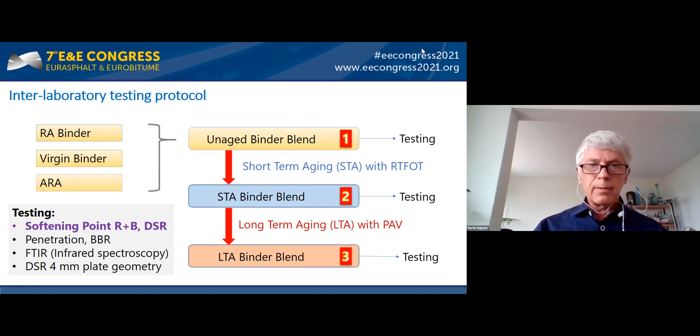So what we actually want to do is to simulate the recycling or the production of hot mix asphalt with 60, 80, and 100% of reclaimed asphalt. So for example, for a 60% rate, you would need 60% of reclaimed asphalt plus 40% of virgin material, which is binder and aggregate.

If we break it down to the binder level, this is 60% of reclaimed asphalt binder plus 40% of virgin binder, plus a small amount of ARA just to soften the reclaimed asphalt binder to the same target value as a virgin binder in this case. So by that, the ratio of the ARA and the reclaimed asphalt binder is constant, so it doesn't matter how much virgin binder we are adding.

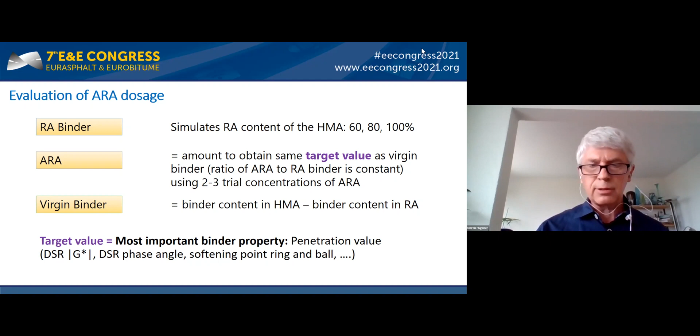The target value is quite important, which we choose, because not every method gives the same ARA dosage, but we did choose the penetration value because it's commonly used. Other methods are also possible, like softening point ring and ball, or G star, that's also an option.

So the first step was then a pre-study to determine the optimum dosage. So if we start with the reclaimed asphalt binder, we did add 5 and 10% of ARA, and you can see that with 10% we are a little bit above the virgin binder properties, a little bit softer. So we decided to use 9% for this interlaboratory study.

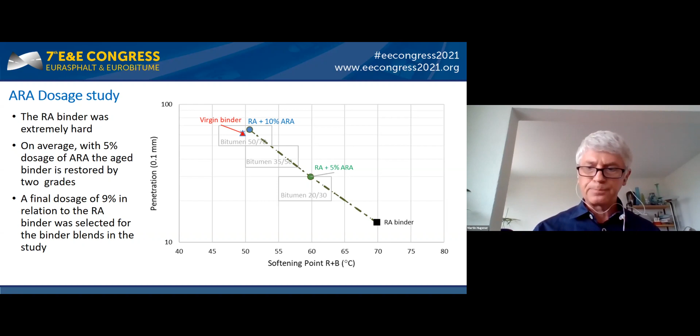So then, to assess the results of these binder blends, we have to compare it to something because we don't have any requirements to meet. So we used the virgin binder we also had as an additional binder, which we did age in the same way, short-term aging and long-term aging.

And you see we come from the penetration of about 60 down to 25 penetration value. It's still quite far away from the reclaimed asphalt binder penetration, which is about 15, but this was actually not the goal to reach that. What we also can see here is that the reclaimed asphalt binder, although it's even quite hard, it's still aging, not in the same amount as the virgin binder, but especially if you look at the softening point ring and ball, it is aging about 10 degrees.

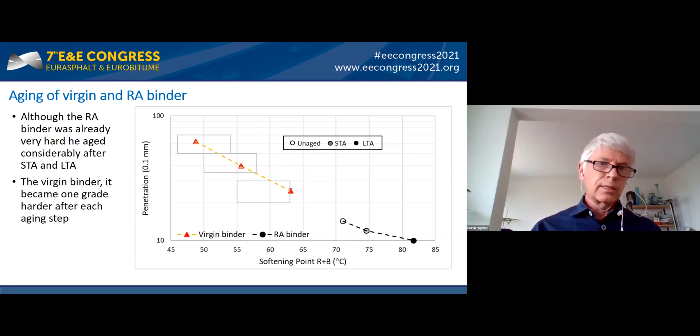So having that, all the labs were able to do their binder blends, aging them, testing them, and what I present here are only the results from the softening point ring and ball, and penetration, because we don't have time for more.

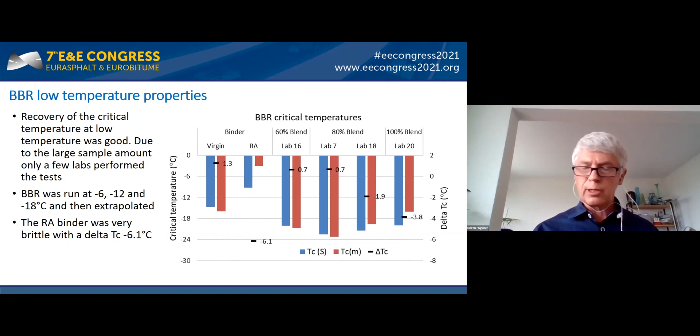So the overall conclusion: the effect of the ARA was not lost after aging, and this did not exceed the aging of the virgin binder, independent of the ARA content and also independent of the temperature range, low, intermediate, or high.

The protocol we used in this interlaboratory study showed quite high reproducibility, except when we didn't have enough results. That's why we are now working on a RILEM recommendation for the evaluation of ARA blends in hot mix asphalt.

These are not all the results we have produced. You will find them in the state of the art report, which is not yet published, and in some other publications which will come or have already been published. So thank you very much, and wish you a nice time.

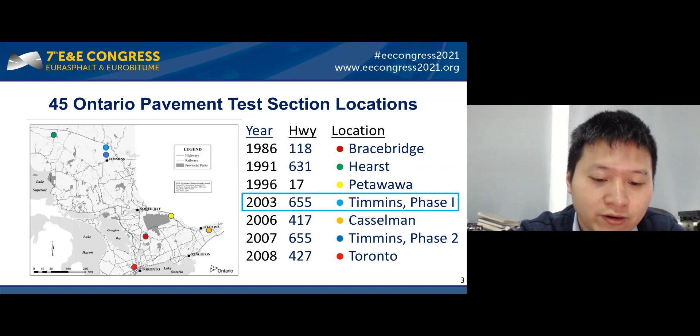Samples tested were original materials as well as binders recovered from core samples taken after 5, 8, and 15 years of service. The purpose of the trial was to validate, and more importantly find ways to improve, the Superpave cracking specifications. All sections were constructed with binders of nearly the same continuous low temperature grade, ranging from -35 to -37. A variety of modification types were used to obtain the grades, and even as early as 5 years, this showed up as significant performance differences for ostensibly the same Superpave grade of PG-34.

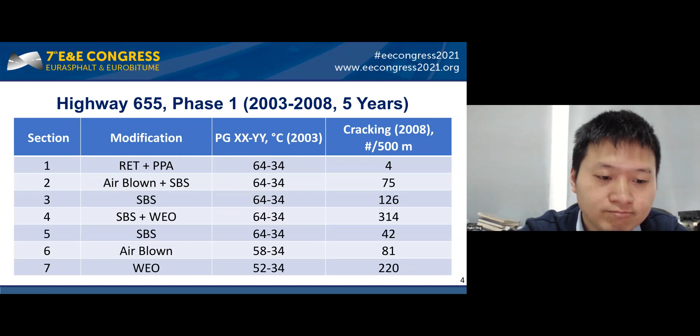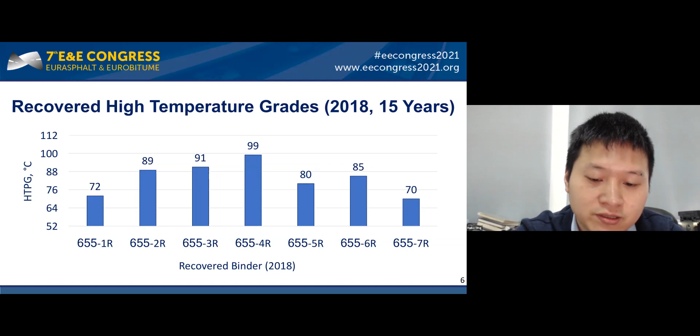The recovered high temperature grades show that some of these sections have hardened significantly. Changes from the original contract high temperature grades range from a low of 8 degrees for the stable Lloydminster binder to a very significant 35 degrees for the Ontario binder that was tainted with about 10% waste engine oil residue.

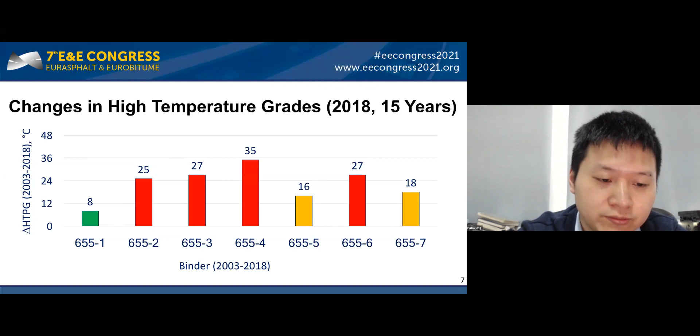We have recently spent a lot of effort on evaluating beta low temperature properties and come to the conclusion that the limiting 30-degree phase angle temperature is a much improved property over both the regular BBR and extended conditioning BBR temperature grades. It can be measured in a matter of hours and provides improved precision.

And a similar accuracy to the extended BBR grades. For this set of binders, though, we can see that the PAV residues are again falling in a rather narrow range, while the recovered binders are more in agreement with field performance. However, sections 1 and 7 grade similarly, which is not in agreement with their field performance, so there is more to the story.

So to capture not only the limit, but also the rheological type of the binder, we have introduced the delta TCD, where C stands for the limiting critical phase angle and the complex modulus G star temperatures, and D stands for DSR. We can see once again that there is a reasonable spread for the PAV residue, but the recovered binders are significantly more spread out. So this once again points to the inadequacy of the RTFO and PAV aging protocol.

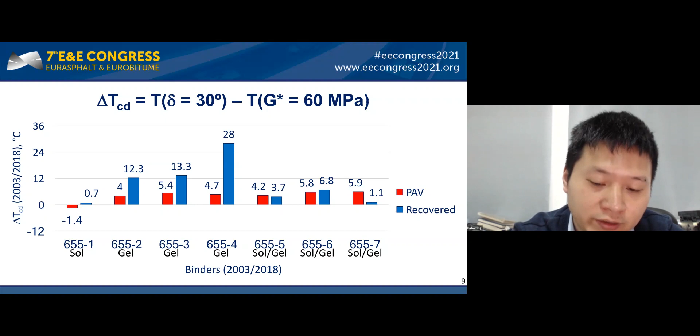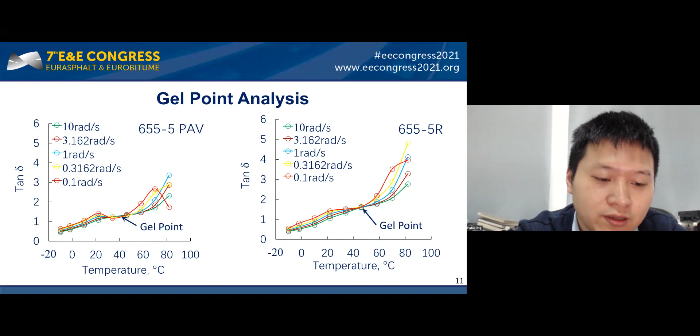We have tested the samples for their gel point, which is rheologically defined by the Chambon-Winter criterion, which states that the tangent delta is independent of the frequency at the gel point. For the 6554 binder, the gel point is quite clear in the PAV residue, but disappeared after only a few years of service. For binder 6555, which has a high vinyl content, the backbone of the polymer remains intact and the gel point is still visible after many years of service. However, because the base binder was not of good enough quality, this section also cracked quite severely in early age.

FTIR analysis of the lab-aged and the recovered binders confirmed once more that the PAV residue is not aged sufficiently. It would likely be better to age for 14 hours or even longer and in thinner films, as we have published at a past Eurobitume Congress in Istanbul. Aging for 14 hours brings the level close to what is obtained for 8 years of service.

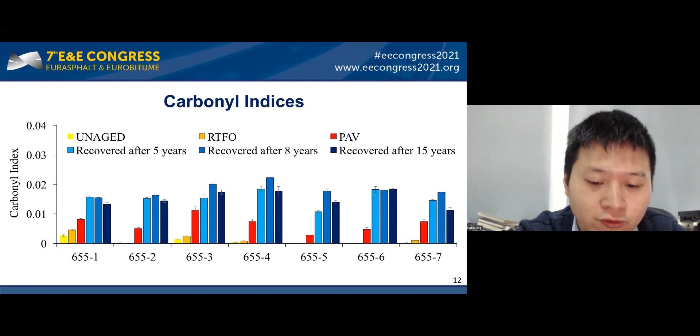The findings for the SBS integrity were not encouraging, as we were able to recover most of the styrene, but the butadiene functionality saw a precipitous decline, and after only 5 years of service, the butadiene group index was reduced by anywhere from 25 to more than 75%. This shows that after 8 to 10 years of service, the effect of the polymer is almost gone when it is most needed.

In summary, the PG protocol that uses RTFO, PAV, DSR, and BBR methods is woefully inadequate and thus must be improved. The limiting phase angle temperature needs more attention, as it provides grades that are much better than those obtained by the regular BBR, are much more precise than those obtained by the extended BBR that use 72 hours of conditioning, and are as accurate or more accurate than extended BBR grades.

The delta TCD provides a handle on the shape of the rheological master curve, or the sol versus gel type, and as such is a good complement to the limiting phase angle temperature.

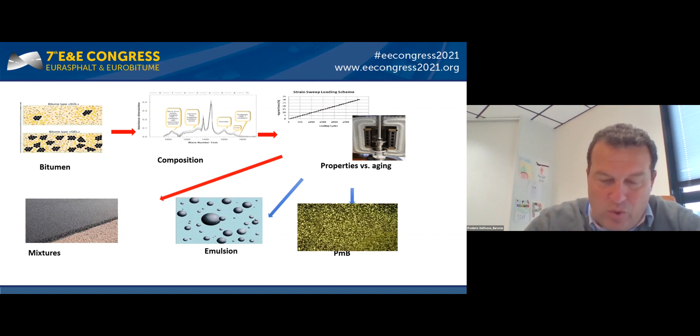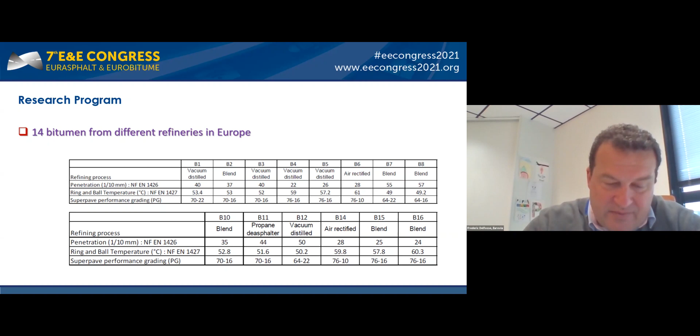In this study, we selected 14 bitumen of 3 different grades and origin. These grades correspond to PG 64-22 up to 76-10. These bitumen are named B1 to B16.

These bitumen were analyzed by numerous tests, all conventional European tests like needle penetration, ring and ball, etc., but also by some rheological tests by DSR. Isotherm at different temperature, the MSCR test, but also by the bending beam rheometer.

We define the TS value, the temperature at which the stiffness modulus equal 300 MPa; the TM value, temperature at which the slope of the log S measured versus log time curve becomes equal to 0.3; and from these two values we calculate delta TC.

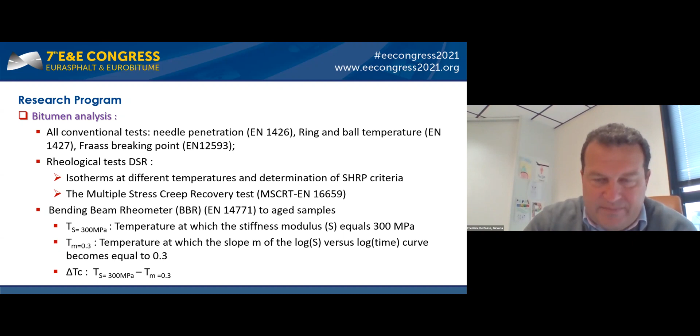So we manufacture 14 hot mix asphalts with diorite aggregates. For all these mixtures, the binder content is the same, 4.9%. For this mixture, we fix the VMA and VFA.

On this mixture, we perform the following tests: the wheel tracking test, the stiffness modulus according to different methods, the fatigue test, and the TSRST test, which is the thermal stress restrained specimen test.

After and before aging, according to the RILEM procedure: 4 hours at 135 degrees C and 9 days at 85 degrees C on the loose mix.

The results do not show a direct correlation between bitumen characteristics and asphalt rutting properties, but rather a temperature threshold for ring and ball and the shift temperature, below which rutting is likely to occur.

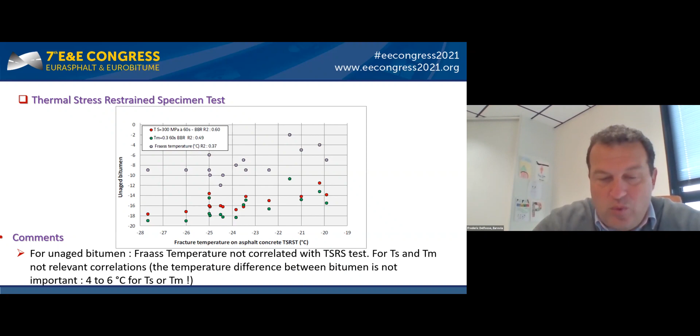We don't notice significant correlations between TS and TM value. We didn't measure significant correlation.

This graph presents for TS and TM and Fraass temperatures the impact of aging after 1 PAV. Relevant differences are measured. The gap between unaged and aged bitumen highlights the importance of simulating aging when analyzing low temperature properties. Some bitumen are more sensitive to oxidation than others, and their low temperature performance can be strongly impacted.

Fraass temperature increase from 5 to 9 degrees C after PAV, and for TM, we observe a delta up to 10 degrees C.

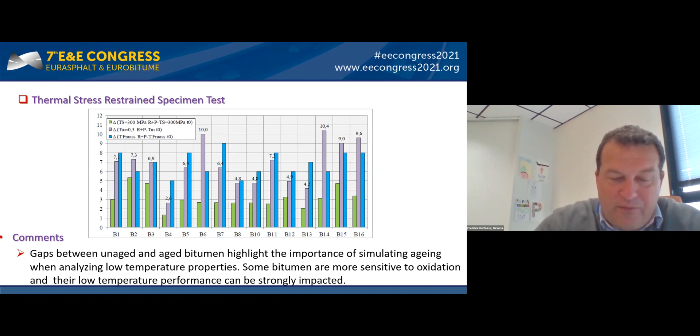This graph presents evolution of the delta TC, which is the difference between the TS and TM value after PAV. This parameter appears as an interesting indicator to illustrate this asphalt oxidation sensitivity. The higher the increase in delta TC value, the higher the sensitivity to oxidation and the lesser the pavement durability.

This criterion has shown a high potential to capture binder embrittlement and pavement premature cracking in North America, where it is now extensively studied and discussed.

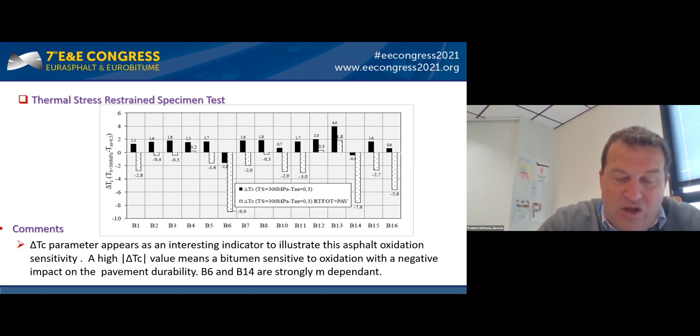To confirm the importance of testing long-term aged asphalt mixes, we measure TSRST value for 3 different bitumen on which we apply the RILEM aging procedure.

On the first graph in green, we can see relevant differences on asphalt mixture between these 3 bitumen. Bitumen B6 shows a very dramatic decrease in its TSRST value.

Before aging, we have -25. After aging, we measure -6.8 degrees. For the other bitumen, B2 and B4, the difference is -10 degrees C or 7 degrees C against 18 degrees C.

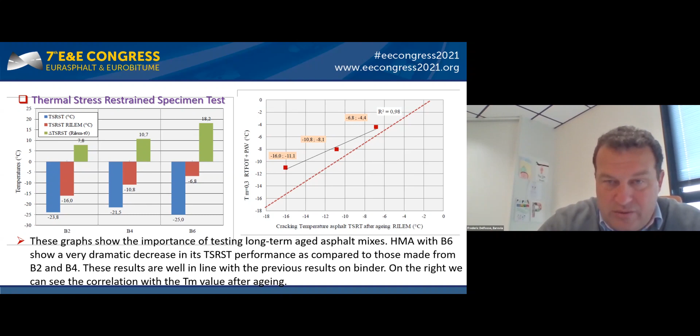These results are well in line with the previous results on binders. On the right, we can see correlation with the TM value after aging, and we observe a very good correlation, only on 3 points. To conclude, this study allows us to present relevant bitumen indicators to predict hot mix asphalt properties.

G star for stiffness modulus on asphalt, the slope of the phase angle at 10 degrees C from the isotherm with fatigue test on asphalt, for the rutting threshold effect with ring and ball, temperature at which G star on sine delta equal 1 kPa appears as interesting, but this test is very sensitive

to aggregate shape. For low temperature behavior, poor correlation between unaged asphalt mixes and bitumen. BBR critical temperature or Fraass values appear as quite interesting for neat bitumen, but mostly after aging.

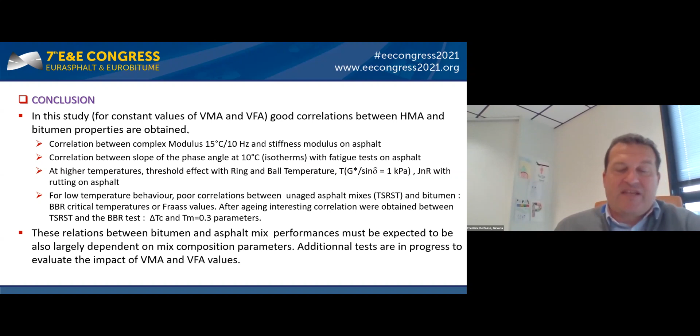The delta TC parameter seems to be very interesting, as well as TM value, to predict the sensitivity of aging at low temperature. This relation between bitumen and asphalt mix performances must be expected to be also largely dependent on mix composition parameters. Additional tests are in progress to evaluate the impact of VMA and VFA values.

Thank you for your attention.

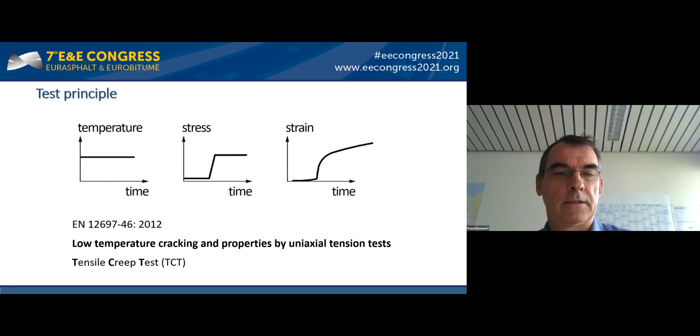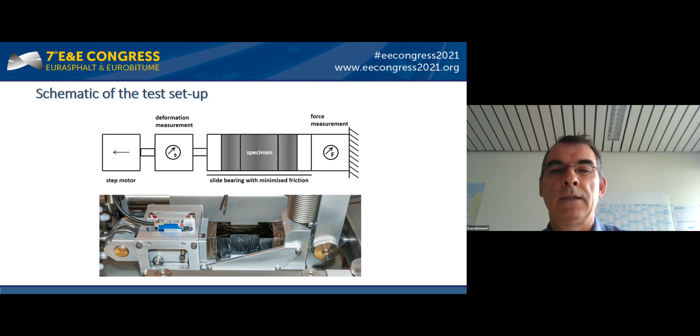Compared to the precise and high-resolution measurement technology, the test specimen appears coarse in terms of its dimensions. In the middle part, the specimen has a cross-section of 1,000 square millimeters. For the binder and mortar test, this cross-section can be assumed to be true for the sample examined.

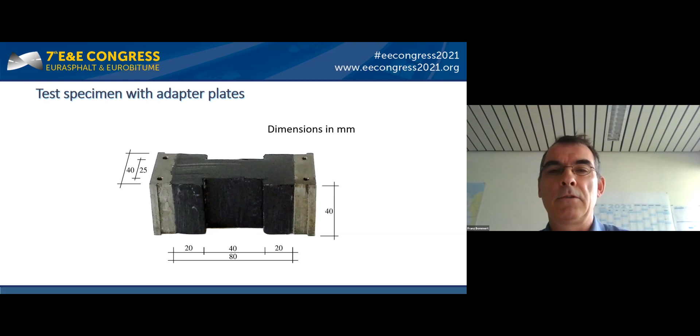In this video clip, you can see the tensile retardation test in time-lapse. The top of the specimen is marked. It can be seen that the main part of the deformation, and at the same time a cross-sectional tapering, takes place in the middle part of the test specimen.

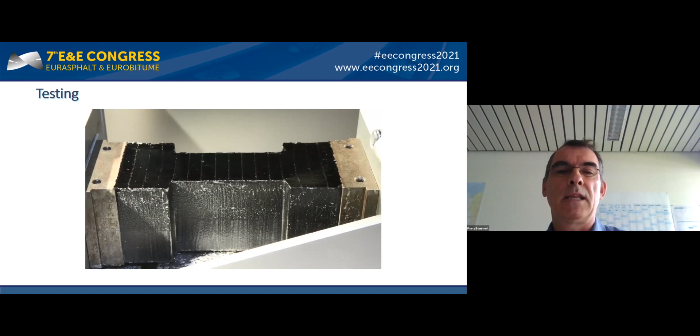And here's a special feature of this test method. The tensile force is adapted to the tapering cross-section in such a way that a constant stress prevails over the entire duration of the test.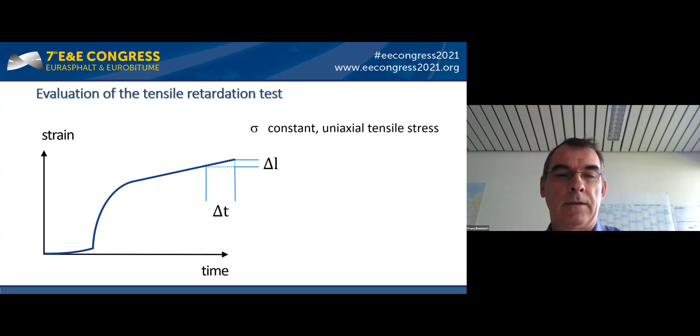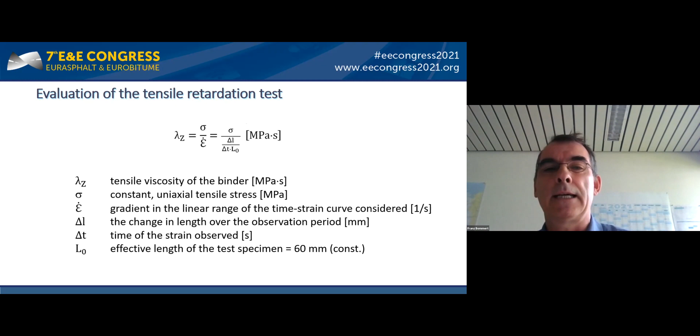An individual test is evaluated by considering the linear course of the deformation at the end of the test period. The slope of the deformation curve is set in relation to the constant stress applied. From this, lambda z, the tensile viscosity, is calculated in units of megapascal seconds.

The evaluation for the tensile retardation test is as follows. The diagram area is spanned by two axes. The viscosity is plotted vertically in units of megapascal seconds. The scaling of the vertical axis is logarithmic.

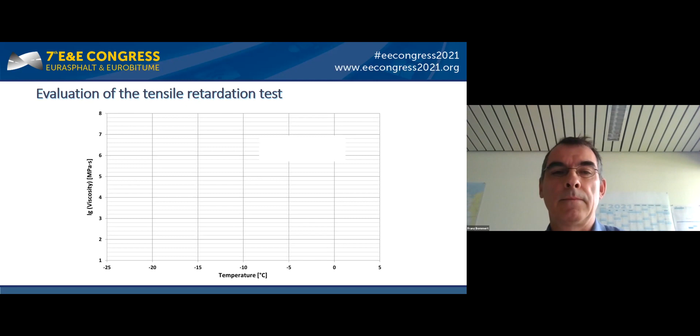The test temperature is plotted horizontally. The temperature scaling is linear. Usual and proven test temperatures for binder and mortar are from +5 to -25 degrees Celsius.

Each point gives a result for the viscosity lambda z. A regression line with a general function y equals m times x plus b can be determined from the single tested tensile viscosities determined at the various temperatures. The coefficient of determination of this regression is usually better than 0.98.

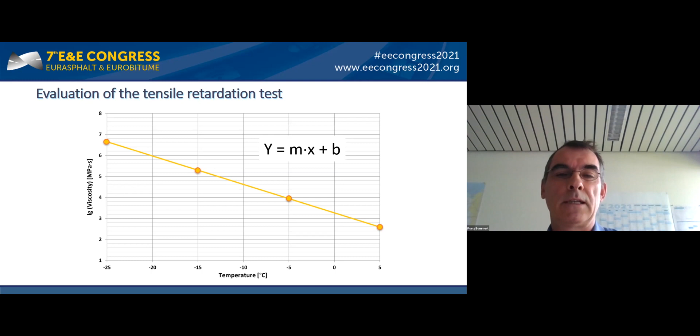After the explanations of the test principle, the evaluation, and the presentation, now results that we achieved with the tensile retardation test.

Here you can see the viscosity characteristics of 5 paving grade bitumen from one manufacturer. The coefficients of determination of the regression lines are all close to 1. The results are convincing for the various penetration classes of the binders.

These are the same 5 regression lines for the 5 paving grade bitumen. The scaling of the axis has been changed. The vertical axis was extended into the range of low viscosities. The horizontal axis has been extended into the area of higher temperatures. The softening points of the bitumen correspond very well with the viscosity characteristics.

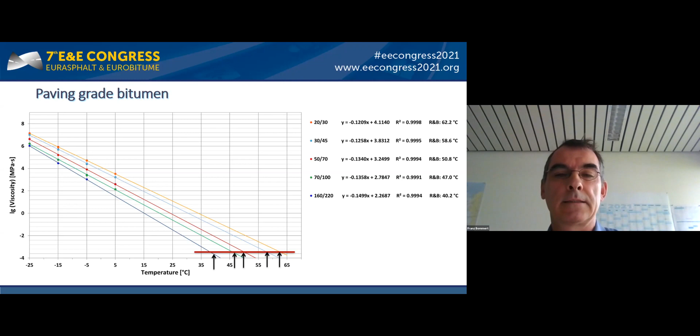The test method tensile retardation test is also suitable for illustrating the effects and changes of binder modifications with wax or rubber or rejuvenators. To keep the time frame, I refer to the full paper in the proceedings.

The tensile retardation test can also be used for asphalt mortar. The stiffening effect of the filler in the asphalt mortar requires greater forces when carrying out the test procedure, so that sufficient and measurable deformations also occur.

We received binders from these two research projects for our investigations on mortar. These are polymer-modified binders of the same type, but from different manufacturers. In the two research projects, different asphalts were tested, both on the warm side with regard to the resistance against permanent deformation, and on the cold side with regard to resistance against low temperature cracking.

For our investigations with the tensile retardation test, we simulated the mortar recipes of the various asphalts. For this purpose, we had the identical binders from the two research projects. Comparable aggregates, that's limestone filler and crushed diabase sand, possibly from another source, were used for the fillers.

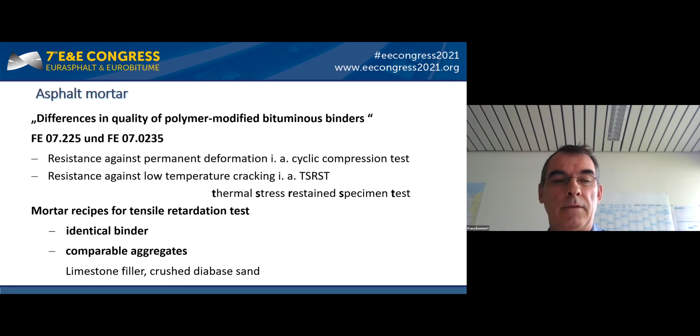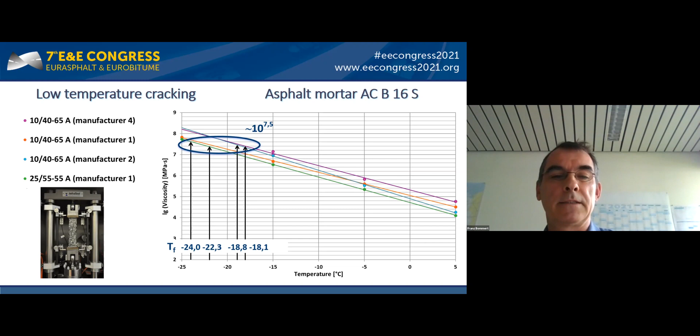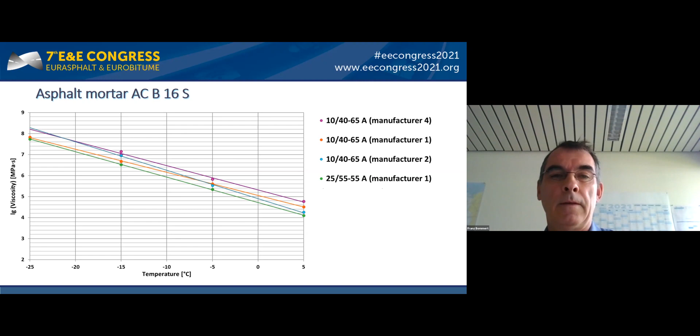Now we derive a statement about the resistance against permanent deformation from the viscosity characteristics of the mortar. We change or extend the axis for viscosity and temperature into the warm service temperature range, and also extend the regression lines for the viscosity characteristics into that range. The test method for assessing resistance against permanent deformation is the cyclic compression test, which is carried out at a test temperature of 50 degrees Celsius.

When considering the criteria of number of load cycles, epsilon for the strain, and epsilon star for the strain at the turning point of deformation, the same assessment of resistance against permanent deformation is obtained as shown with the ranking of the mortar viscosities at 50 degrees Celsius. So here too, there's a congruence between the results of the two test methods.

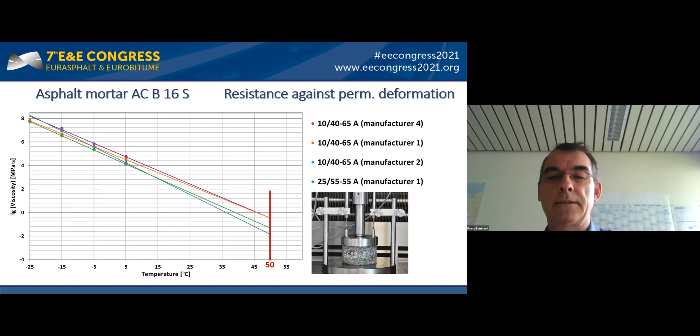To keep the time, a short summary. The tensile creep test is a robust and at the same time sensitive test method. You can use it on binder and mortar. The characteristic of viscosity describes the temperature sensitivity of the binder and mortar. The test method illustrates the effectiveness of modifications, and offers presentation and assessment over the entire service temperature range. It's a single test method for the competing properties of asphalt on the cold and the warm side. The test method can be used very well for mix design: first, the selection of suitable binders, and further for suitable composition of the mortar.

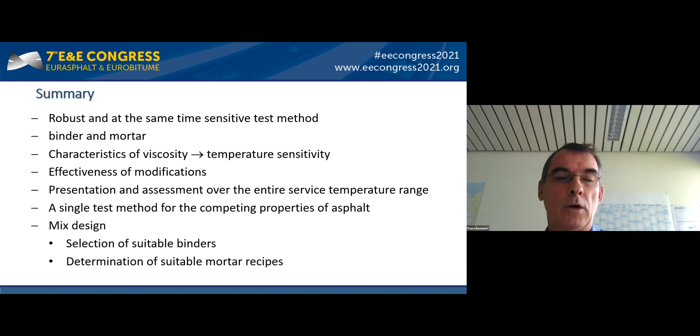Thanks for your attention in the virtual audience, and a special thank you to the co-author, Ms. Franka Wünscher. Thank you, Franz, for your presentation addressing this tensile creep test on binder and asphalt mortar.

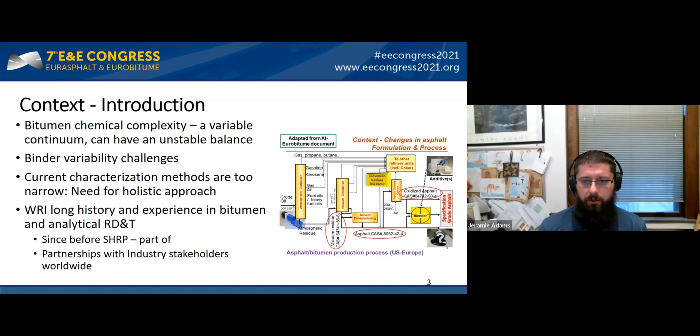At WRI, we have a long history in characterizing bitumen and also asphaltenes. This started well before the SHRP days and has continued to today with a variety of industry projects, particularly through our Asphalt Industry Research Consortium, AIRC. In this program, we have characterized over 100 different asphalt bitumen samples, and we have a whole wide range of materials.

They have a variety of different processing conditions that were applied to these materials, such as visbreaking and air blowing, but also a wide range of modifications that have been done through polymers and different additives.

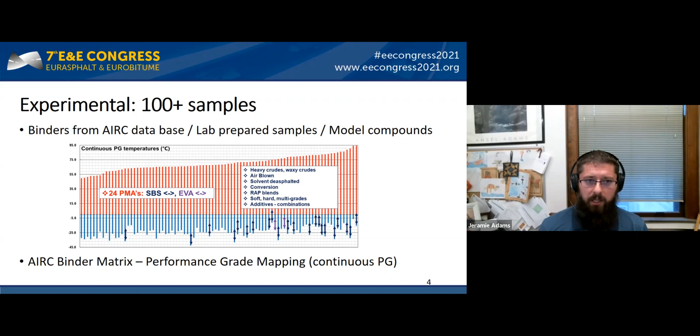One of the tools that we've used to help us understand, differentiate, and predict properties from these materials has been our SARA AD separation. This separation is a combination of chromatography for the saturates, aromatics, and resins, and solubility for the asphaltenes.

Here's a typical chromatogram shown from our separation. We can see we have one saturates fraction, three aromatics fractions, a resins fraction, and three fractions of asphaltenes. This is something very unique and patented by WRI, and it can tell us a lot about the performance of bitumen materials.

One of the things we wanted to do was understand more about what kind of molecules report to these fractions and how that helps build the structure of the bitumen.

One thing I want to point out real quick, there's a plot highlighted in red here. This is just showing that the amount of asphaltenes we get from the SARA AD separation, the total asphaltenes, is very consistent with the amount of asphaltenes you would get from doing a benchtop precipitation of asphaltenes.

If we look at these different fractions, the saturates fraction can have linear saturated alkanes, but it can also have highly cyclic materials, as shown here. The aromatics 1 fraction is very similar - it has a lot of aliphatic character, but there is one aromatic ring on most of these molecules, though it doesn't change its properties significantly from saturates.

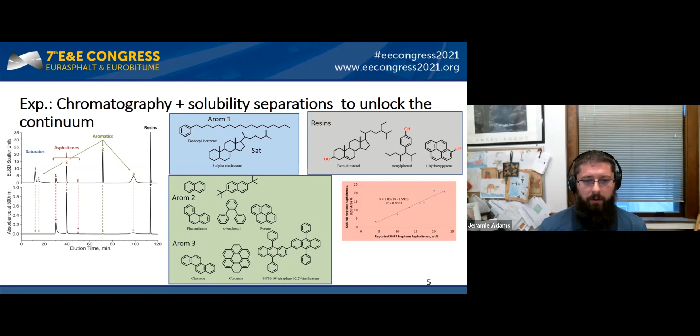The resins fraction can have a variety of structures, but the main thing here is that it has the presence of some heteroatoms in different types of functional groups. These can be oxygen, nitrogen, or sulfur.

The asphaltenes are still a complex set of molecules, and we don't have good model compounds, but we're understanding more about them, especially the nuances between island and archipelago structures. The main thing we've done is really help the world see that there are different types of asphaltenes.

There was a development of understanding in the past from Boduszynski, who said there's one class of molecules, or one molecule, that can be isolated as an asphaltene. Richardson later said, no, it's a whole complex set of molecules. And at WRI, we said, no, we can go further - there's actually different classes of compounds that can be extracted in the asphaltenes.

We've done this by using solvents of different solvent strength. This is the solubility portion of the separation. We separate asphaltenes using cyclohexane, toluene, and dichloromethane, solvents of increasing solvent strength.

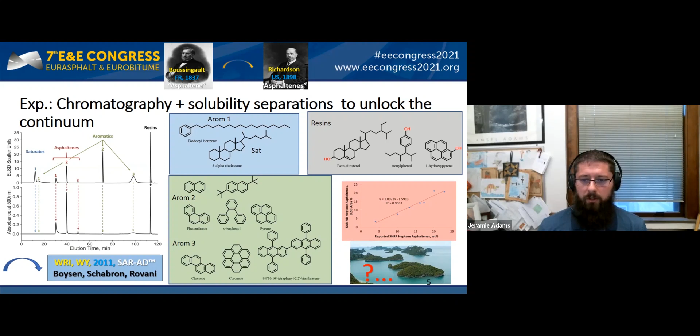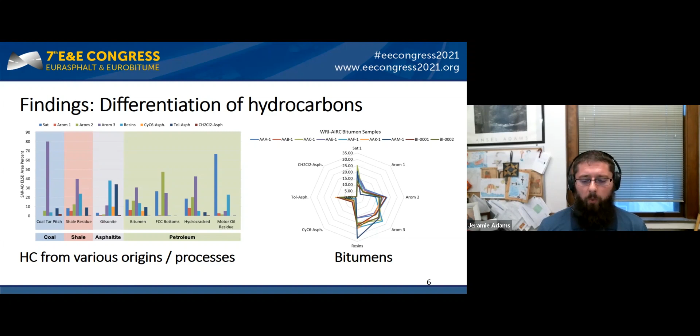One of the things that is also very important, that we can get from this method and not others, is that we can tell if your material has been cracked. This is important because of IMO 2020, and a lot of marine fuel oils have in them a big outlet for cracked bottoms from different processing methods. These cracked bottoms are not desirable in asphalt for paving because you've lost a lot of the aliphatic side chains, so it cannot relax stresses. If you can't relax the stresses, it can lead to cracking, especially at low temperatures.

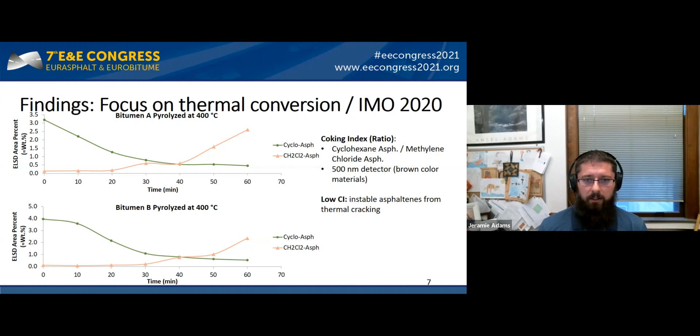So these are two different bitumen that were pyrolyzed at different times, and we're only looking at the cyclohexane asphaltenes and the dichloromethane asphaltenes. We can compare the ratio of the two and get a coking index, and this can show us very clearly if our material has been cracked. So here are some examples.

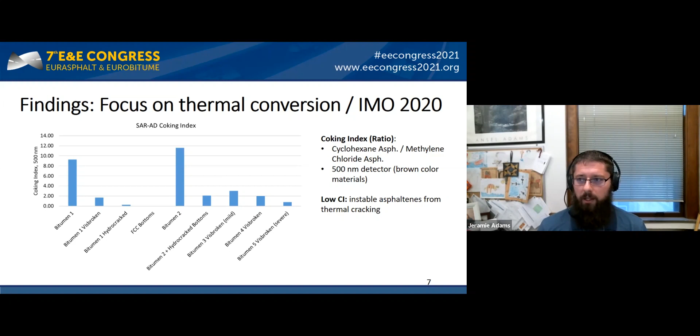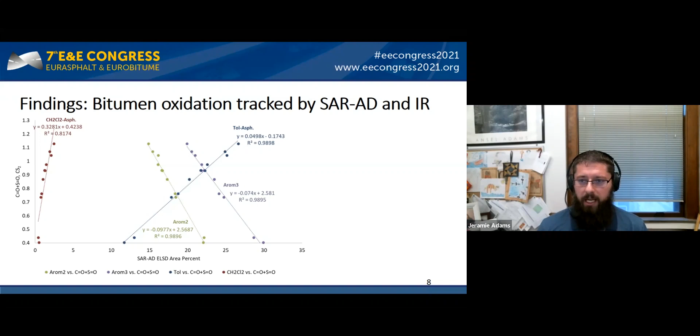If we focus on the net change, we see that aromatics 2 and 3 decrease, toluene asphaltenes increase, and dichloromethane asphaltenes increase. This has implications on the performance and the behavior of the material.

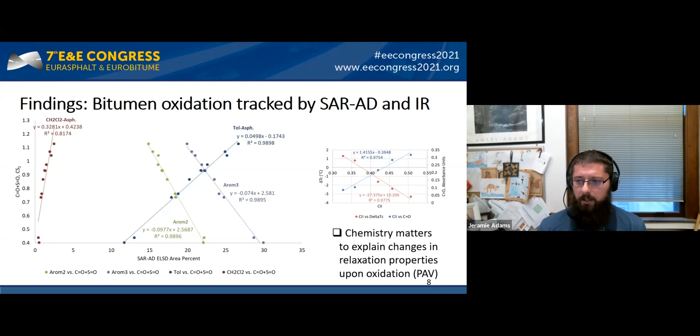And also for the performance of the material through delta Tc, which is kind of a cracking parameter based on the relaxation of the material. This is directly related to the composition and changes in the composition.

So with this method, we know it doesn't tell us everything. We do occasionally run into a situation where we'll have two materials with a similar profile that behave differently with an additive, or two materials with the same properties but a slightly different profile. So there's some chemical reasons that underlie this.

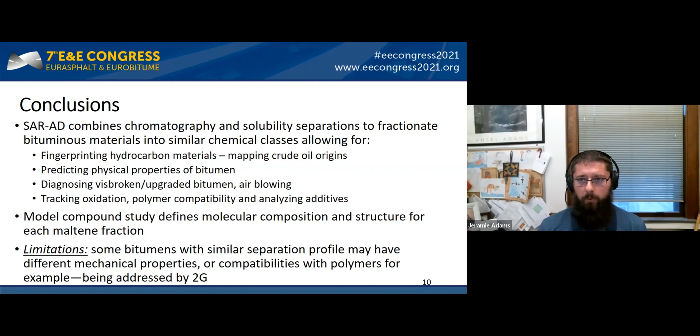We can track oxidation. We can track polymer compatibility of the different materials. And we can look for additives. We have a lot more insight now because of our model compound study, but we do recognize that we have some limitations. And so we're addressing these limitations by adding additional ways to look at the fractions and drill down further and see why these are different. And this is showing a lot of promise.

So our end goal is really to help suppliers and users to design bitumen, to buy and purchase and use the best bitumen for their application, and to help them understand that there's a whole variety of changes that are occurring at the refinery level, and to diagnose these and to get around them.

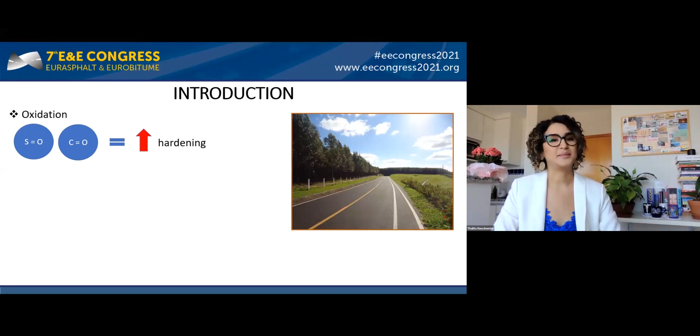The oxidative aging extends over the pavement lifespan and is one of the main reasons for bitumen hardening. The formation of chemical functional groups containing oxygen, such as sulfoxides and carbonyls, increases the bitumen consistency. The excessive hardening can be negative since it contributes to premature fatigue cracking in pavement subject to high deflection.

Some test protocols are available to simulate the field bitumen aging. In general, these tests simulate only the effects of temperature and oxidation. However, the effects of ultraviolet radiation are not considered.

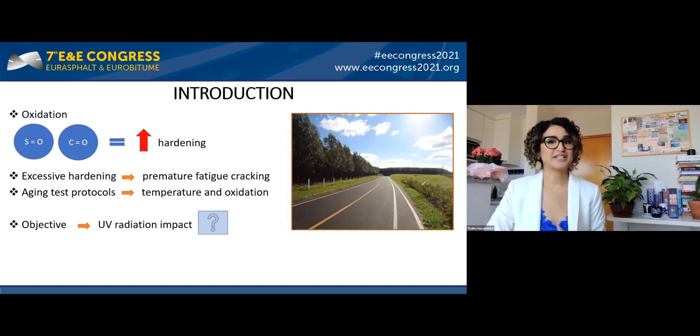Therefore, the study aims to analyze the impact of UV aging on the rheological properties of modified bitumen. It is important to choose bitumen less susceptible to photooxidative aging, especially in regions where intense UV radiation throughout the years is present, as in Brazil.

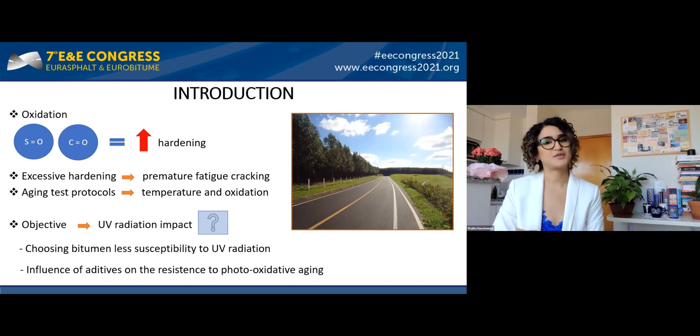Studies including various modified bitumens are necessary, as the influence of additives on the resistance to photooxidative aging is still not entirely known. The experimental plan was performed using a neat bitumen and 6 modified bitumens with polyphosphoric acid (PPA), crumb rubber obtained from scrap tires, SBS copolymer, and low-density polyethylene.

The samples were previously short-term aged in the rolling thin film oven (RTFO), and then subject to 2 different long-term aging procedures: the photooxidative one, employing a weatherometer, and the thermooxidative one using the PAV. The linear amplitude sweep (LAS) test was performed on the aged residues to evaluate the effects of aging on the fatigue damage resistance.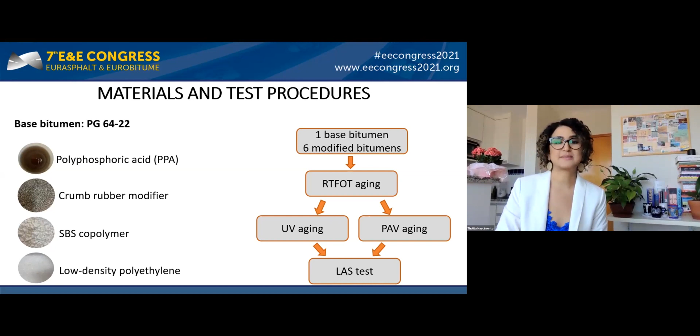Regarding the LAS test, it was performed in a DSR according to AASHTO TP 101-14 at the temperature of 25 degrees Celsius. The test was divided into 2 steps, a frequency sweep and an amplitude sweep, and the results were used to adjust the fatigue model, where Nf is the number of cycles to failure.

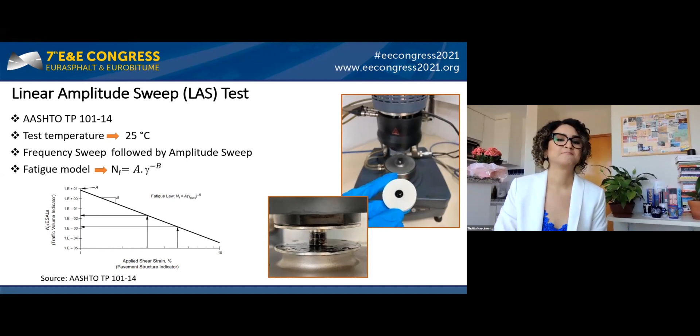The LAS results were also used to obtain the fatigue damage tolerance index, Af, related to material failure, which was proposed by Hintz in 2012.

However, some materials could not be determined using the Af index, as we can see for the UV aged bitumen plus rubber plus PPA in the curve of figure 2. A possible explanation for such limitation, according to the literature, is the occurrence of adhesion problems between the sample and the metal plate, or the predominance of flow over the cohesive fracture due to fatigue.

So, as an alternative to this issue, we also used in this work the approach based on the linear elastic fracture mechanics (LEFM), proposed by Nuñez and others in 2016. This approach considers the macrocrack propagation in the material observed during the test. The failure criterion is the peak of the curve of stress intensity factor K versus crack length a.

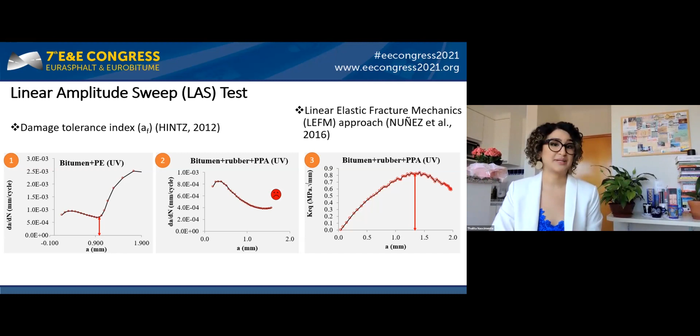Then, applying the LEFM approach, it was possible to obtain the crack length for materials such as the bitumen plus rubber plus PPA, as we can see in figure 3.

The analysis based on the viscoelastic continuum damage (VECD) shows that for a low strain level of 3%, which represents pavement with low deflections, the bitumen plus rubber and rubber plus PPA presented the longest fatigue lives for both long-term aging levels. For a high strain level of 30%, the bitumen plus rubber and rubber plus PPA also presents the best performances for both long-term aging levels.

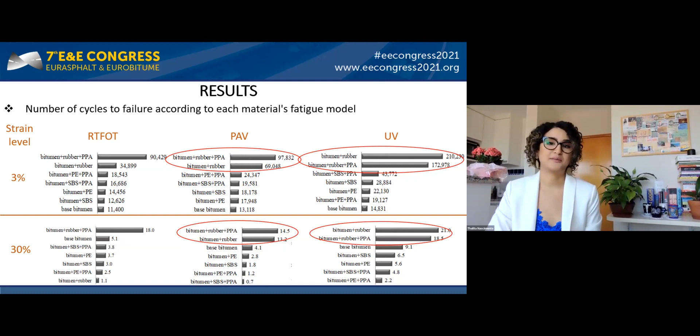The basic bitumen presented the lowest fatigue life at 3%, but it stands out well positioned at high strains in all aging conditions. The results show that bitumen modification is generally positive at low strains, but only some modifiers can increase fatigue life under high pavement strains.

When we compare the PAV and UV aging, we can note that all materials' fatigue life for both strain levels was higher on the UV radiation, except for the bitumen plus polyethylene plus PPA at 3% strain level.

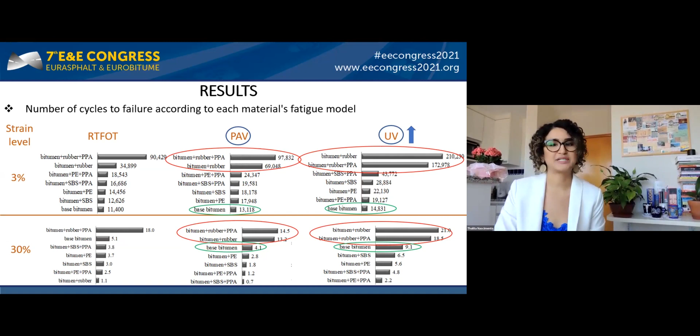The results that could not be obtained from the Af parameter were obtained using the LEFM approach, which showed to be effective given that all materials had their crack length at failure determined.

By comparing the results for PAV and UV aging, it's possible to observe that all samples aged in PAV presented a higher tolerance to damage when the parameter analyzed was the Af.

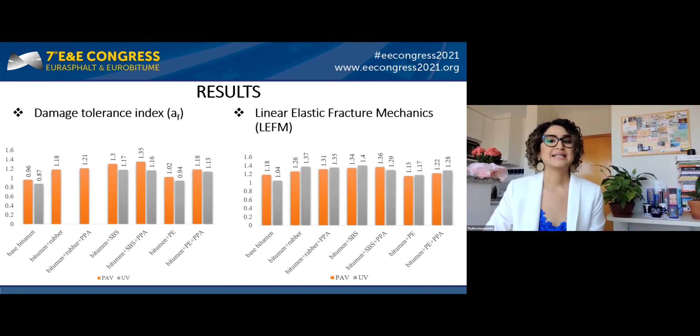However, when the analyses were obtained by the LEFM approach, it was the opposite. Most materials present crack length at failure higher in the UV aging condition. And for both methods analyzed, we can see that the use of modifiers increased the fatigue resistance.

Based on the results, the materials were ranked from least to most sensitive for PAV and UV aging, assuming the best ones are those with the highest fatigue lives, the highest AF, and the highest crack length at failure based on the LEFM approach. So the bitumen with the best performance is bitumen plus rubber plus PPA, followed by bitumen plus rubber. In the last positions, we have bitumen plus polyethylene and the base bitumen.

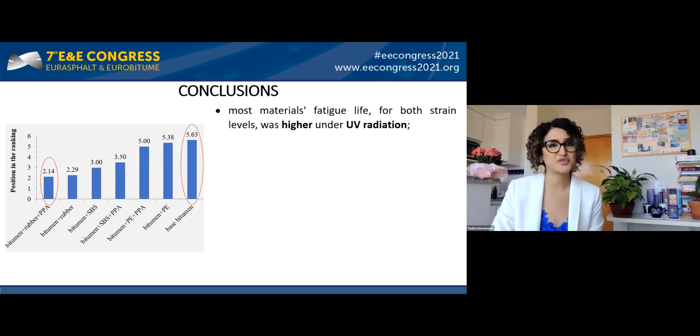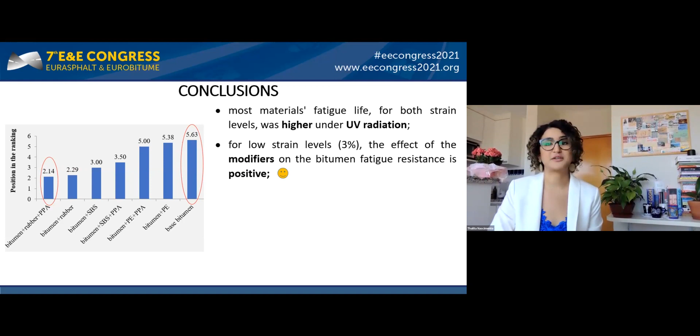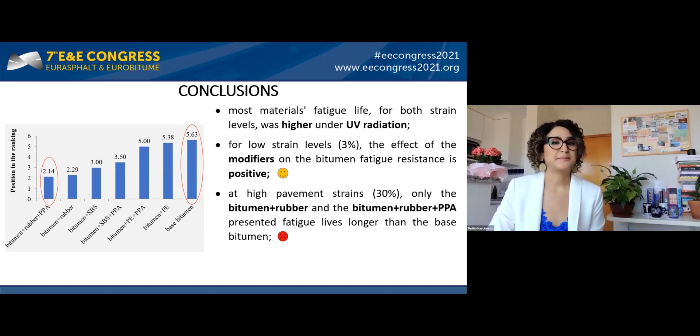To conclude, I can highlight that most materials' fatigue life for both strain levels was higher in the UV radiation condition. For low strain levels of 3%, the effect of modifiers on the bitumen fatigue resistance is positive for all aging levels. At high pavement strains of 30%, only the bitumen plus rubber and rubber plus PPA presented fatigue lives longer than the base bitumen. The LEFM approach showed to be an effective tool to analyze the LAS test results.